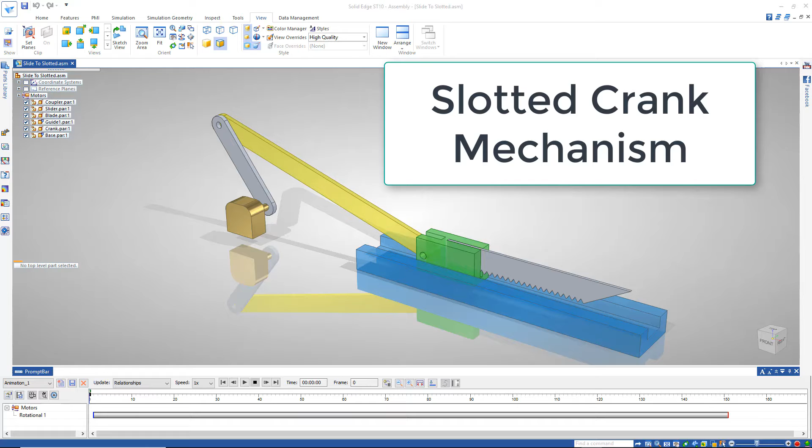Now, this crank slider mechanism isn't the only way to drive this saw blade and all these other examples we've been looking at. So let's look at an alternate way to drive this.

To get started, let's go out to our class files and open a folder called Slide to Slotted. Double click on that and then open up the assembly Slide to Slotted. What I'd like to do now is modify this crank slider mechanism to a slotted link mechanism.

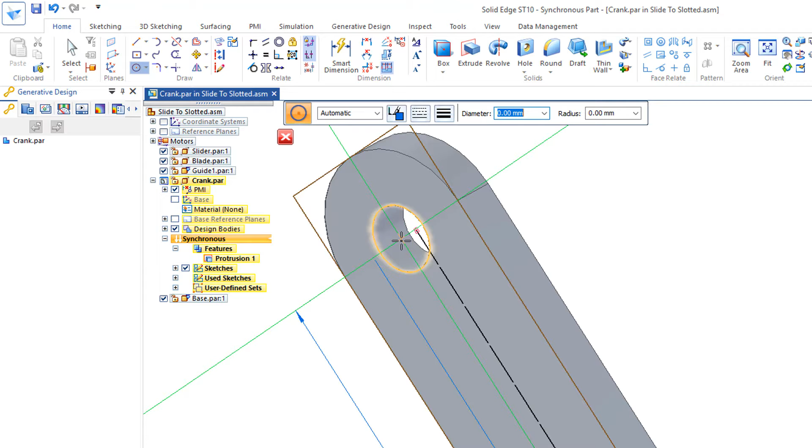I'll start by deleting this link right here and modifying a couple of parts. I'll start with this piece right here, the crank. And I'm just going to add a circle to this face here at the center. And this is 8, I'm going to extrude.

I'll get the option here, single or chain, doesn't matter which, and I'll push that out 5. I'll close and return, fit the view. And now I'll modify the slider part.

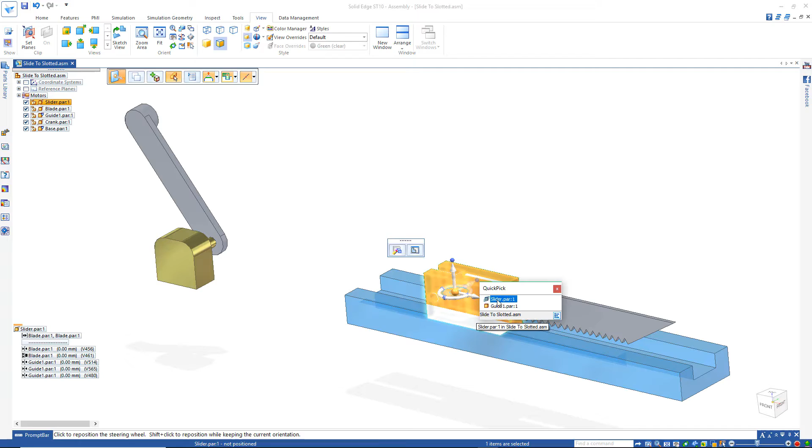I'll double click on that, open the slider. I'd like to delete this cutout here, Cutout 2. Identify, right mouse click, and hit delete. I'll also delete this circle, I'll just identify it there and hit delete.

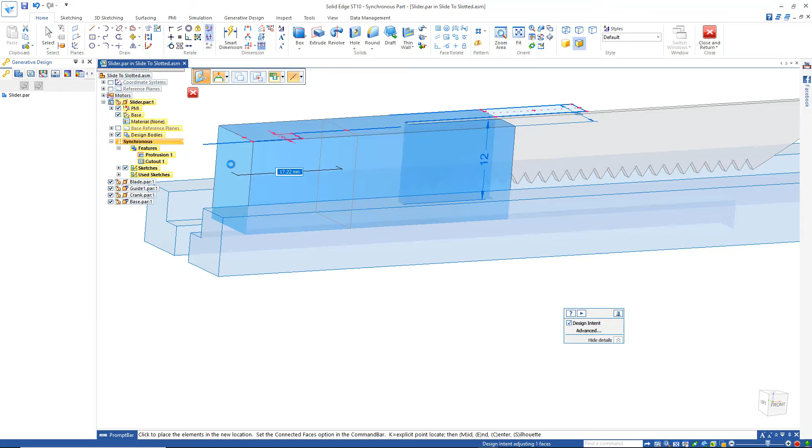And I'd like to just extend this face. Let's push this out 90 millimeters. I'll fit the view and hit escape.

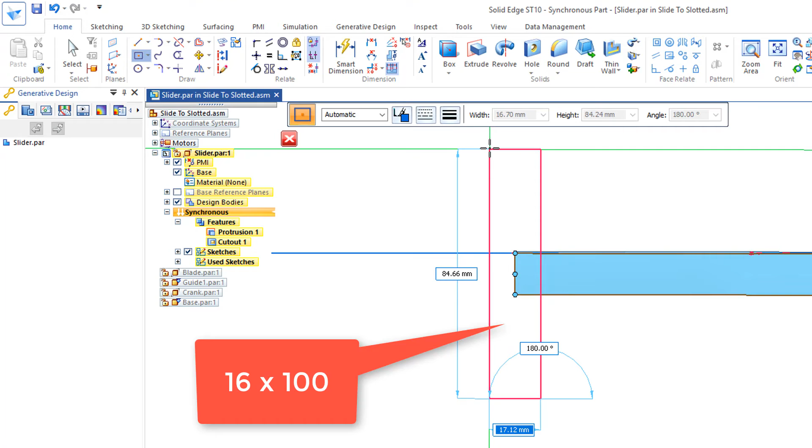What I'd like to do also is just turn off these other parts so they're not in the way for a moment. And go out to rectangle by center, and on this end here, I'd like to lock to this face, this front face. I'll just create a rectangle. I'll make that 16, tab, 100.

And I'll extrude this chain. I'm on chain option, I'll extrude that backwards. I'll just lock to this back piece right there, so it's the same thickness.

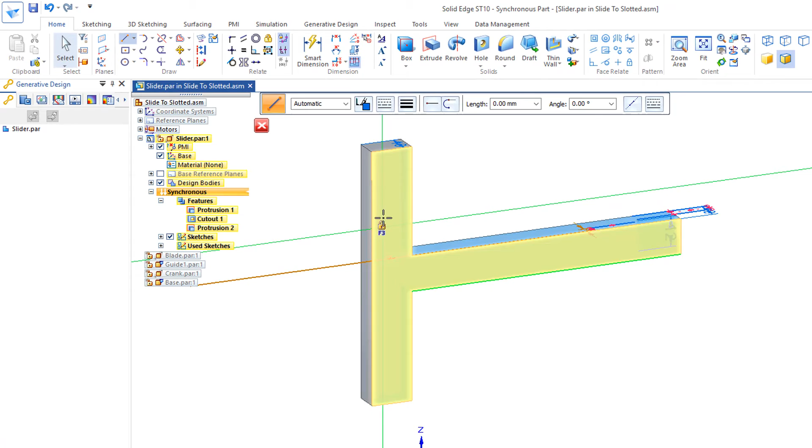Then I'd like to draw a line on this front face. I'll lock to this face and draw a line, and I'd like that to be 80, tab, enter. I'll just constrain that so it's centered with the top and centered here with the side. Horizontal, vertical constraint there so it's in the center.

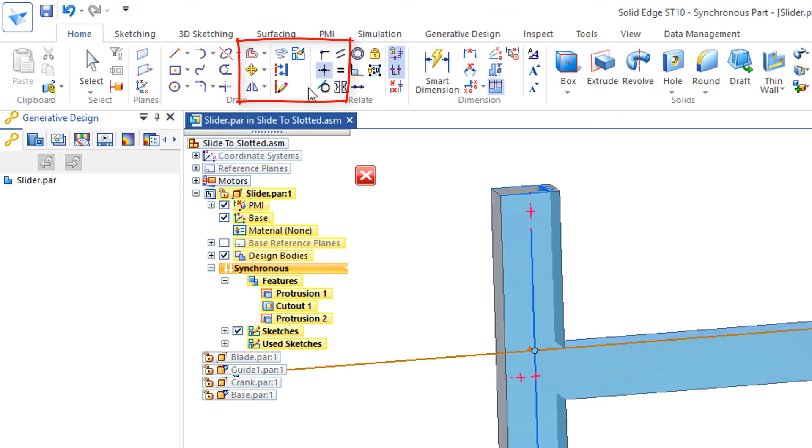And I'd like to go out here underneath the offset button. There's a symmetric offset. And I'm going to use a width of 9 millimeters. That's the only thing that really matters here.

And I need this to be an arc, this one right there. So once we've selected those two, I'll go and identify the line, green check mark, and I'll go and hit the select button and extrude that region in 3 millimeters. And close and return back to the assembly.

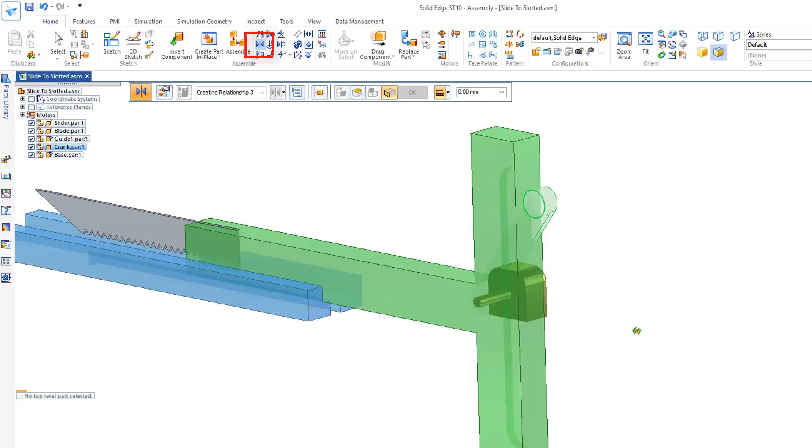Now I'd like to mate and align this face. I'll go to the mate command and mate this front face right here that I created with this face right there. And then I'd like to go to the tangent constraint and take this circular face, take that cylinder and constrain it to this edge here, tangent, right there. And I'll fit the view.

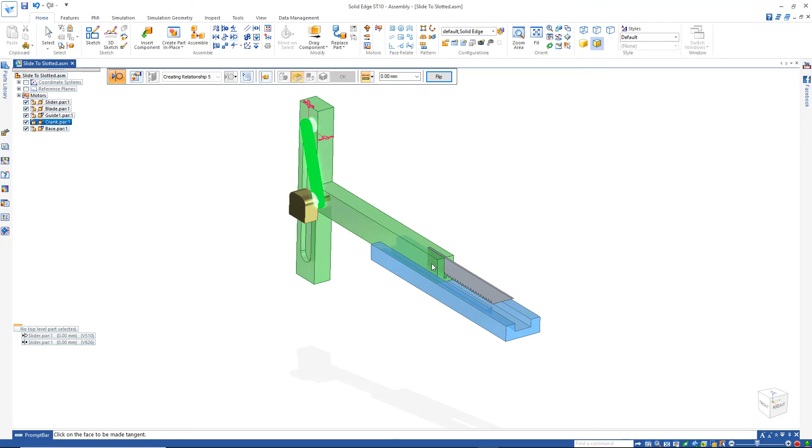Now let's go to our motors and run this, simulate motor, and see what this looks like.